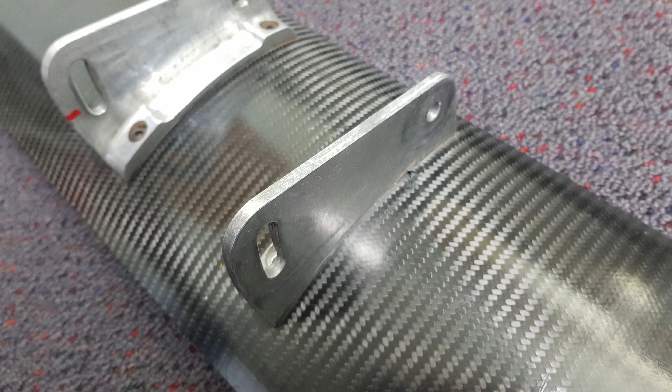This is what it looked like when I got my hands on it. When you remove the lower mounting brackets, it looks like this.

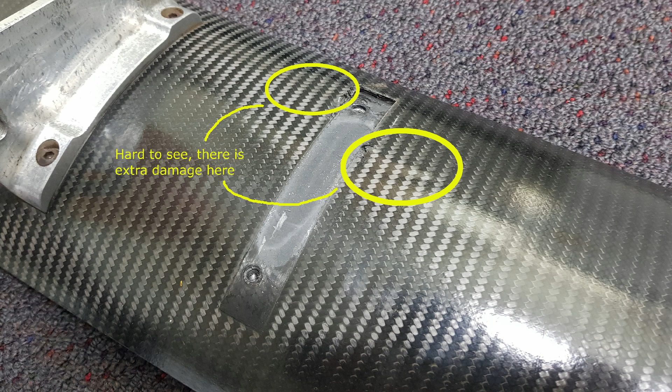The more astute of you may notice there's a slight hole there. The mounting bracket sheared through the skin, and there is also some damage either side of where the bracket sits.

So this is where it all gets interesting. I assumed the secondary damage was delamination from the core, but then I got a bit of a surprise.

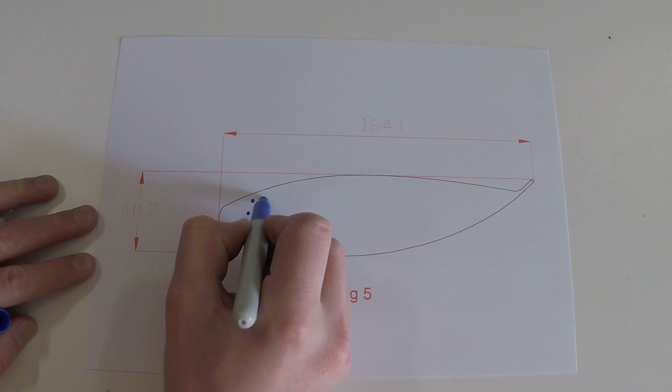So I thought the wing would look like this. It'd be a carbon skin full of foam or honeycomb to create some kind of core, much like a helicopter blade. I also thought there'd be some kind of captive threaded nut sleeve that would be sitting around here to pick up those attachment points.

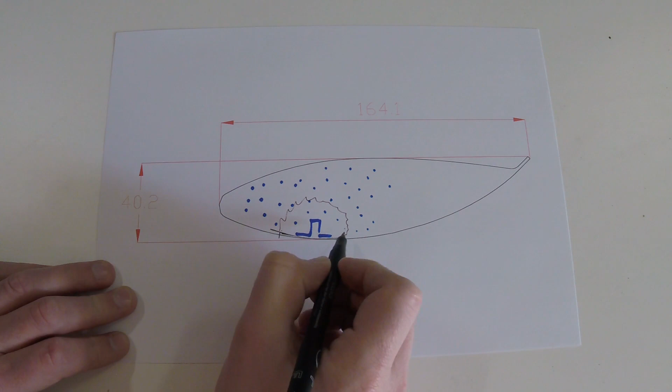To repair this, I was going to cut away the damaged skin areas. I was then going to cut into the foam to hollow out an area. From there, I'd make a doubler and I'd put that doubler over the cut lines, add a second layer of skin to the whole thing, fill it full of foam, and then work out some kind of way to do the captive nut, probably based on whatever Dallara had done in the wing in the first place.

So I cut into the wing to start it all, and then found out that all of my assumptions were completely wrong. Instead of the wing looking like this, as expected, the wing actually ended up looking like this.

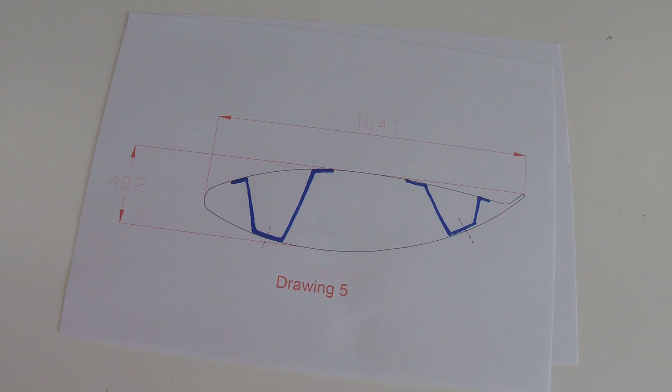There was no core material in the wing, it was actually hollow. Instead, there were these shear webs that were picking up the top and bottom layers at both the bolt points, kind of like an I-beam.

This kind of screwed my plans. The good news is the attachment points turned out to be much more simple than I expected. Instead of being a complicated specialty fastener, they were simply a block of aluminium with a drill and tap hole in them that picked up both points to maintain alignment and distances.

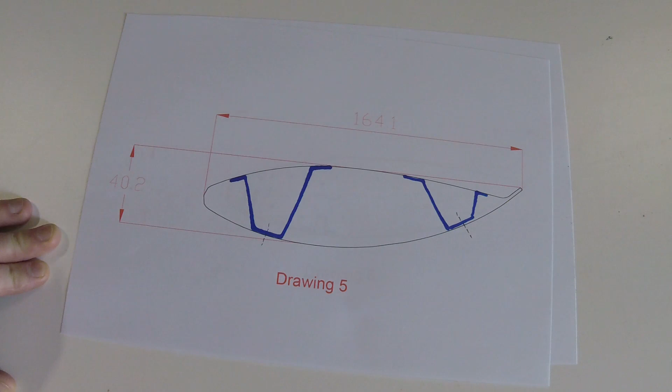So this is what the actual wing looks like, complete with the custom cuts added by yours truly. Here you can see the outer skin, the inner shear webs, both sides, and also the aluminium block with the threaded and tapped hole. That block goes all the way through to this hole here and picks up this point.

If you recall the damage from the previous photos, you may not be surprised that the shear web was also damaged, so it's been cut back a bit in order to facilitate this repair.

To fix this wing, I'm going to create a custom shear web to replace the damaged section that picks up from this surface down here and this surface down here, and then sits over this area.

From there we'll put a doubler underneath all of these cut sections to provide reinforcement and load path into the new wing skin. We'll then put a wing skin on that'll be thinner than this actual material, and then we'll grind this material back and put a couple of capping layers over, generally in this area here.

So first up I have to identify the shape required for the shear web doubler and make a mould for it.

To do that I started with a piece of paper and cut it down to size, trying to match it and fit it over the shear web doubler. When I took too much paper away, I added some tape and then cut into that as well. In the end, I came up with this, and it sits on and goes over there like that, fitting in and forming that shear web nicely.

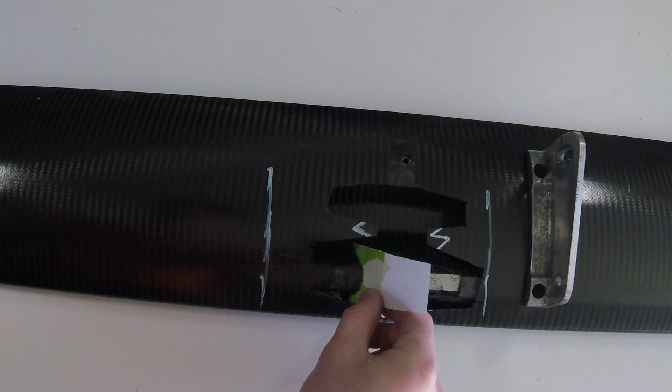I took that cut piece and made up a set of ruled lines, stuck it in place, and scanned it in using a normal scanner. From there I used a CAD program to take those two lines, stretch the image to the right size, draw around the perimeter of my template, and then make the part. To double check what I had done, I 3D printed a template and confirmed it does fit just like this, so I knew I was onto a winner.

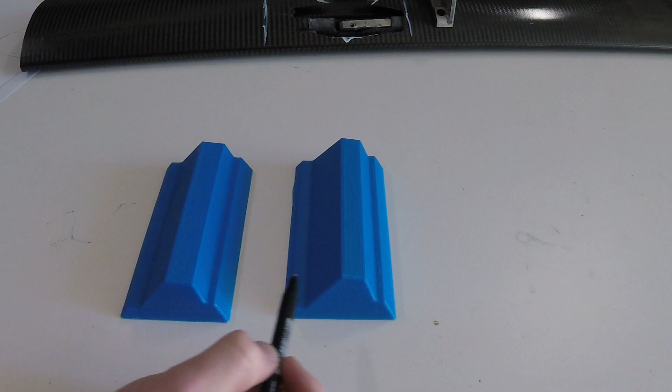From there I 3D printed a mould of the required wing rib, just like this, and then worked out that I'd done goofed, and printed another one. The difference between these two moulds is this top section and how high or deep the mould is. You'll see that on the original section the top part actually lines up perfectly with my check piece, whereas on the reprinted one there's a gap here of about 2.5 millimeters.

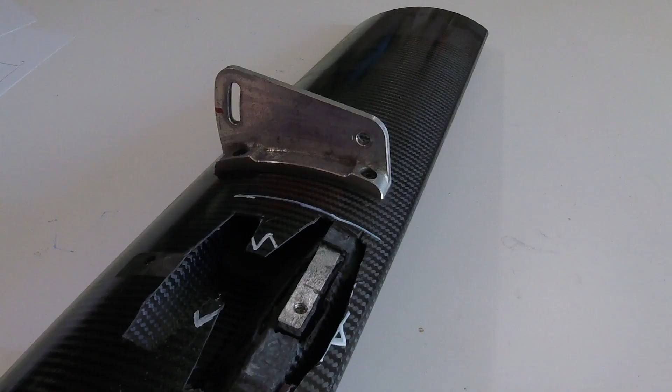The reason for the change in the mould was so that the new rib section would sit flush with the original rib section so that we could bond the rib or the wing skin in place.

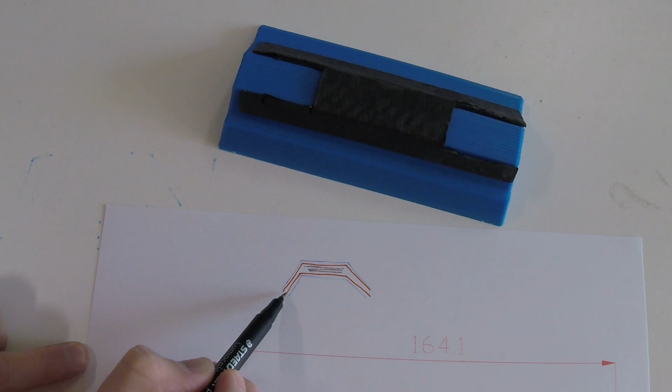From there I laid up the carbon fibre wing rib using 200 grams per square metre twill for the outside two layers that you can see here, 300 GSM biaxial for the inner layers, and unidirectional 160 gram per square metre fibres for the inside layers at the top, and they were only at the top. Total thickness of the top section was about 2.5 millimeters, and these side bits were 4 layers of the 200 and the 300, which brings it to about 1.2 mil thick.

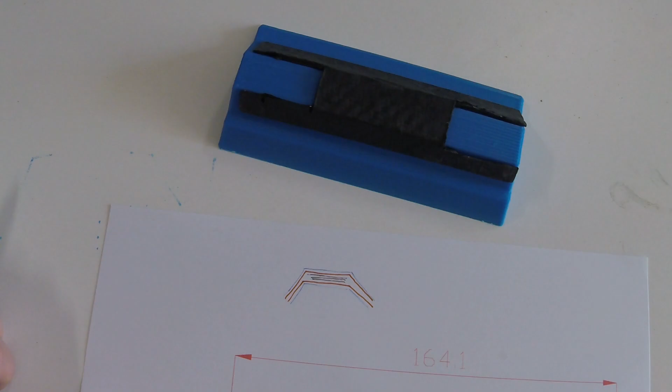I then cut it to size, and it fits in the wing rib nicely. Here you can see the replacement rib section cut to size and in location.

To make the mould itself, I was super lazy. I love using the 3D printer. It's really simple and makes things - well, I don't have to do any work, but things stick to them. Instead of doing mould prep and sanding and all that kind of jazz, the simplest solution is just to wrap a bit of builder's plastic around it and then mould up over that. Builder's plastic doesn't stick to anything, gives a pretty good surface, and conforms reasonably well.

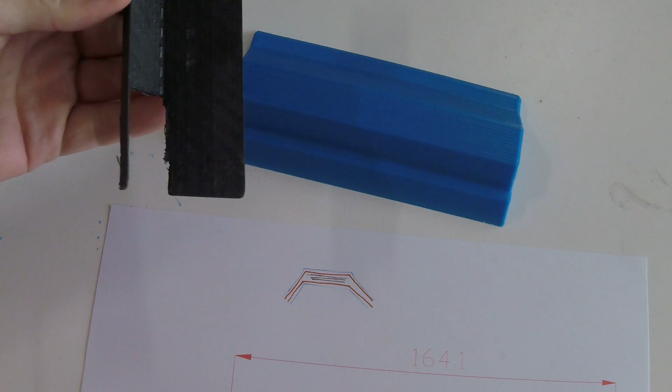The inside layer of the rib itself is actually peel ply, so it has a nice bonding surface, and so is the outside layer. So the stack went builder's plastic, peel ply, carbon, peel ply, breather cloth, and then in a vacuum bag.

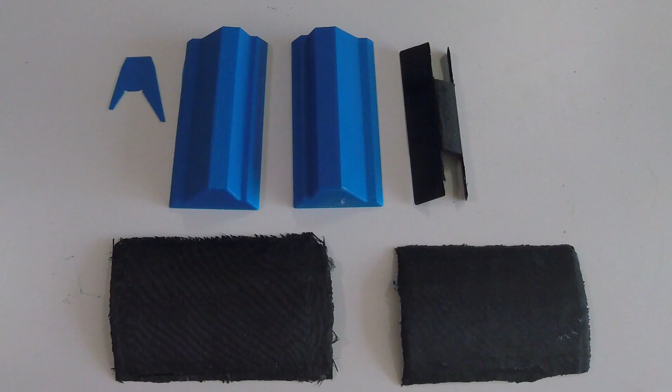So far for this repair I've made the following parts: all of the moulding required to make the wing rib itself, the replacement skin, and the doubler. The replacement skin is about 1.5 millimeters thick, and the doubler is about 3 millimeters thick. All of these have been made using the 2x2 200 grams per square meter twill and the 300 GSM biaxial.

To make both the doubler and the new wing skin, I did a similar thing as I did with the mould. I wrapped the original wing in a piece of builder's plastic, laid down peel ply on the underside to give a bonding surface, and then laid the carbon fibre up over the top of that.

Instead of bagging this one, all I did was put some more peel ply over the top, some breather cloth over that, and then wrap the whole thing in masking tape to pull it down nice and tight. From here I have to key up the inside of the wing so I can bond the new rib in place. Then I've got to cut the doubler down to size, put it in position, and put the new wing skin on top of that, before throwing a capping layer over the whole lot to make it nice and smooth and back to being an aerodynamic component.